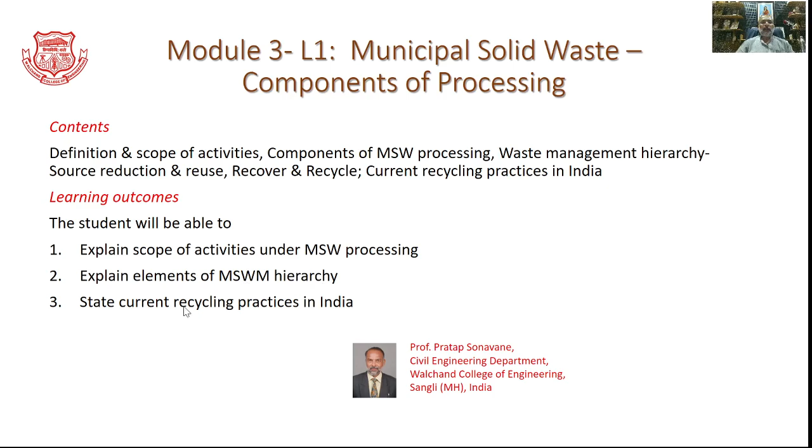As you learn the content, you will be able to explain the scope of activities under municipal solid waste processing, explain elements of municipal solid waste management hierarchy, and also state current recycling practices in India.

Since our last presentations, we have been discussing the functional elements of solid waste management. In the last presentation, we discussed the transfer and transport of municipal solid waste. In this presentation, I wish to focus on separation, processing, and transformation.

In order to have a better understanding of this particular element, we'll try to have various activities split up in this particular form. The way you see here,

we were discussing this transfer station facility, in which we also discussed that this particular facility can be equipped with a material recovery facility, which would have some application of intermediate as well as centralized sorting.

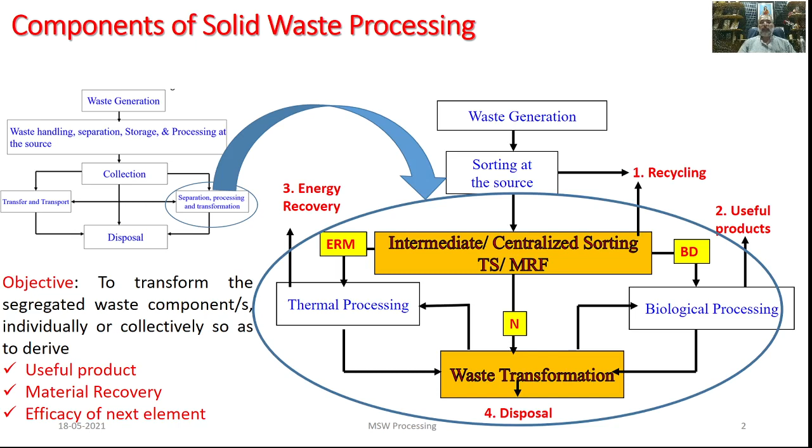So according to our earlier discussion, processing is an activity by which solid wastes are transformed into new, more acceptable form, or recycled product or products.

So after this transfer station, we are having the waste stream divided into biodegradable waste and non-biodegradable waste through the material recovery facility.

So as we follow this biodegradable waste channel, subsequently it would be sorted out, it would be compacted, and further it could be composted, vermicomposted, or anaerobically digested in order to generate biogas. As such, it is being transformed into the usable product.

Whereas, thinking of non-biodegradable waste, these are processed through the material recovery facility, they are compacted, and further sent to the recyclable market, or transformed into refuse derived fuel, which can further be used as fuel in waste to energy plants, and ultimately we prepare that residue for its ultimate disposal.

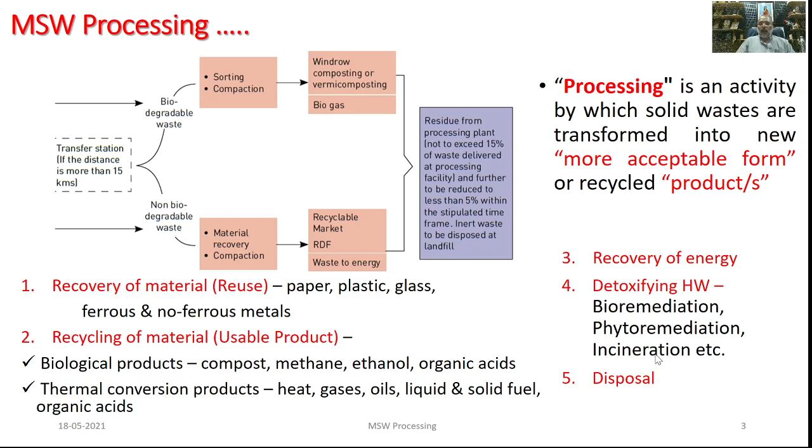In order to have the common sense out of these waste management practices for the layman, for the common man, through such ecology infographics, the attempts are made in order to make the people aware. As you see here, this particular graphics is telling about composting, incineration, zero waste, energy recovery, recycling, as well as landfilling in order to enhance the waste management practices.

Also, the slogans such as reduce, reuse, recycle is also made popular. However, as we wish to attach the technical sense to all these particular management practices, we must follow the proper hierarchy among these reduce, reuse, recover, recycle, and similar terms.

So, as far as this waste management hierarchy is concerned, the first and foremost step that we wish to have is reduction. This can be achieved by reducing the raw material requirement, by increasing the longevity of the product, by devising the better substitute and eliminating the need of the product. As we reduce this raw material and as we follow the practices associated with the reduction of the waste...

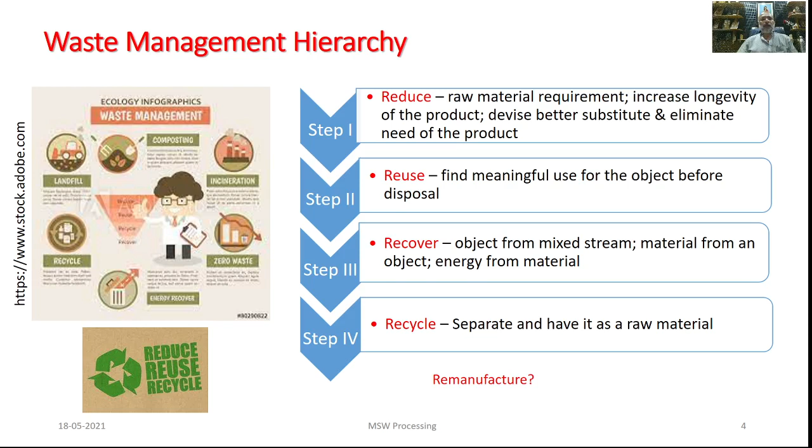So, this source reduction and reuse are most preferred options as far as integrated solid waste management hierarchy is concerned. Because these are the options which are directly associated with the cost, associated with the handling, treating, disposing, as well as the impact of that particular waste on environment is concerned.

This results in savings which accrue through avoided collection, treatment, as well as disposal costs. Further, that reduces the burden on the public authorities that are responsible for managing that waste. The reduction as well as the reuse, and hence reduction in the generation of the solid waste, helps to reduce the emission of these greenhouse gases which are associated with the climate changes.

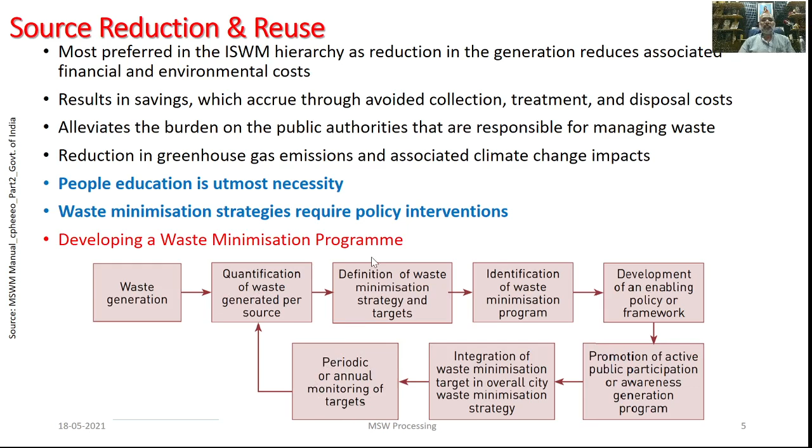If we simply focus on reuse, it happens when something that already fulfilled its original function is used for another purpose. Through these particular pictures, we can get a fair idea associated with reusing.

Typical reuse of glass or polyethylene terephthalate, abbreviated as PET, water bottles, or old tires, or street drums and barrels as compost bins. Or a simple example of using plastic bags as liners for household waste bins can make the concept of reusing very clear.

Some lateral thinking can have these waste products used as aesthetical elements. Here you can see old tires used in order to have road dividers, and certain green patches are developed through old tires.

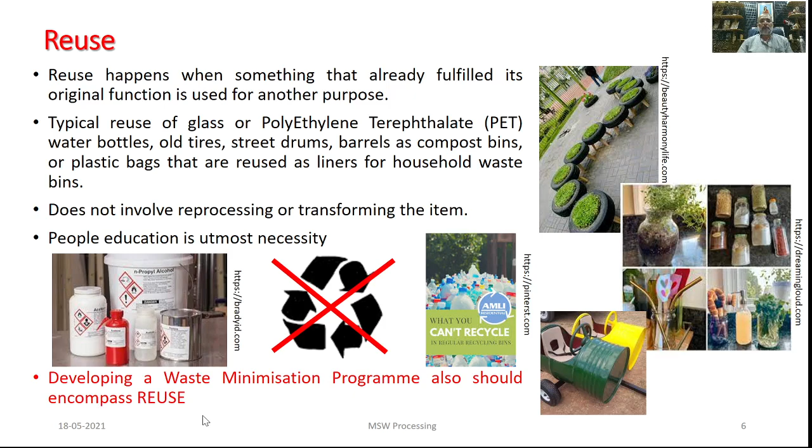However, there is a need to take certain precautions, and for that there is a necessity of people education. For example, there could be certain materials which are not expected to be reused as well as recycled. Hence, there is a need to organize programs to educate people on what they cannot reuse and what they are not expected to recycle. While devising this waste minimizing program, as we try to involve various stakeholders, making people educated is also necessary, and hence this program should also encompass the reuse principle.

As far as recovery and recycling is concerned, we can understand it as the process of transforming segregated solid waste into a new product or raw material for producing a new product. This definition is given by the Solid Waste Management Rules 2016 in India.

Such recovery and recycling policy should be adopted before planning for processing or devising any treatment facility. Here, one can focus on processing non-biodegradable waste to recover commercially valuable materials like plastic, paper, metal, glass, and also certain e-waste.

Such recovery and recycling diverts waste from the municipal solid waste stream, and assists the sustainable use of various resources. It also results in saving scarce resources, and reduces environmental impact and the burden on waste management practices.

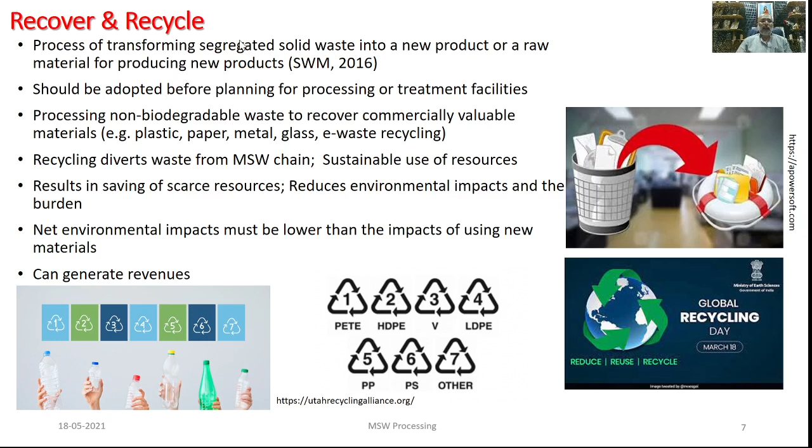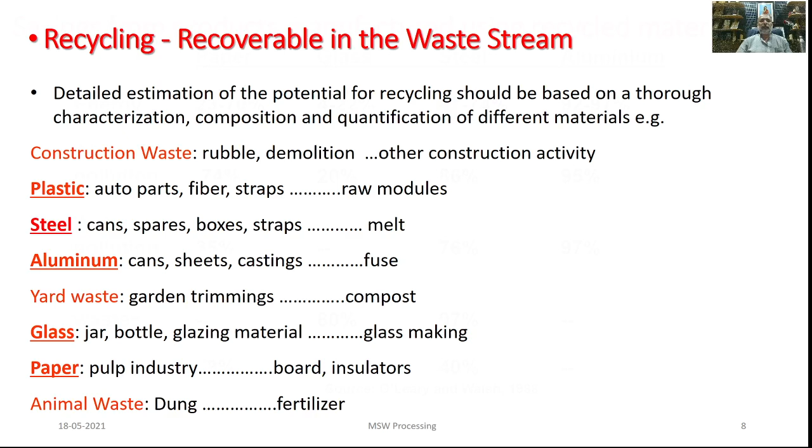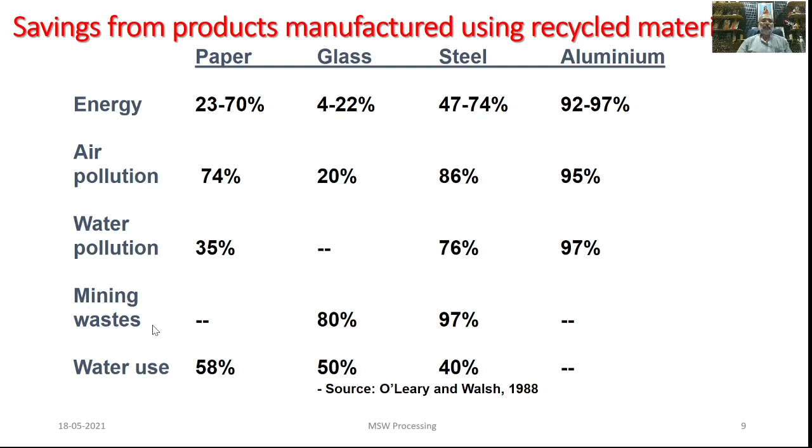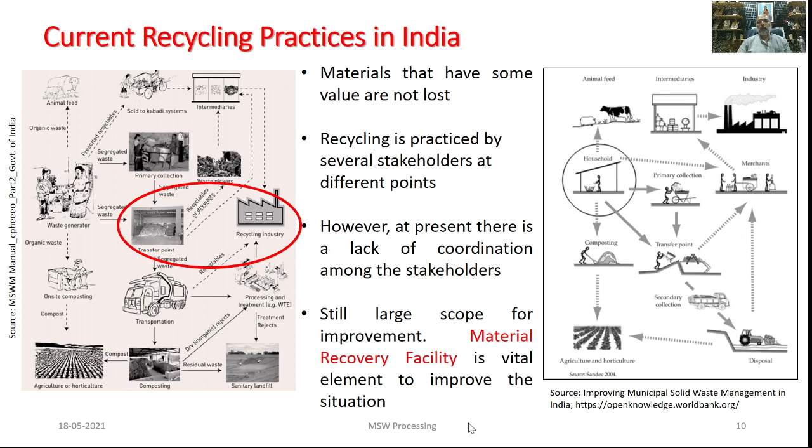In this presentation, we have attempted to understand the background of the processing. As we move ahead, we will discuss the elements of the material recovery facility. So, till then, I wish you very happy learning. Thank you.